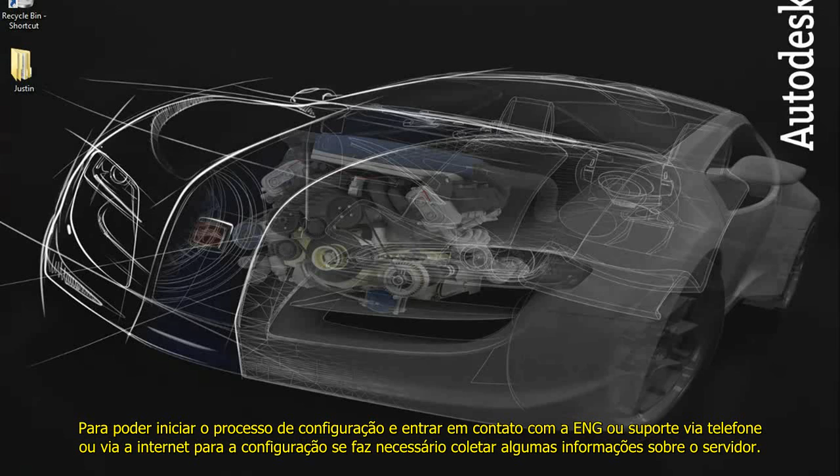To do this, we'll want to go to your Start menu, All Programs, Accessories, Command Shell, and in the Command Shell type in ipconfig /all and hit Enter. This will display all your machine's relevant information.

What we're interested in here is the host name as well as the physical address, or commonly known as the MAC address. Once you have this information, you're ready to call or contact the registration department so that you can register your serial numbers and receive your keys.

In terms of contacting the registration department, you can do so through the installation, or if you have gotten past that point, there are two other methods. One is over the web, by going to the website listed here on the screen, or by calling 1-800-551-1490. Keep in mind that there are 4 primary things needed by the registration department to register your license.

First is the host name, second is your physical address, third they'll need your company name, and fourth they'll need the serial number or serial numbers of the products that you want to register for licenses. Once you have those 4 things, feel free to contact the registration department at your leisure.

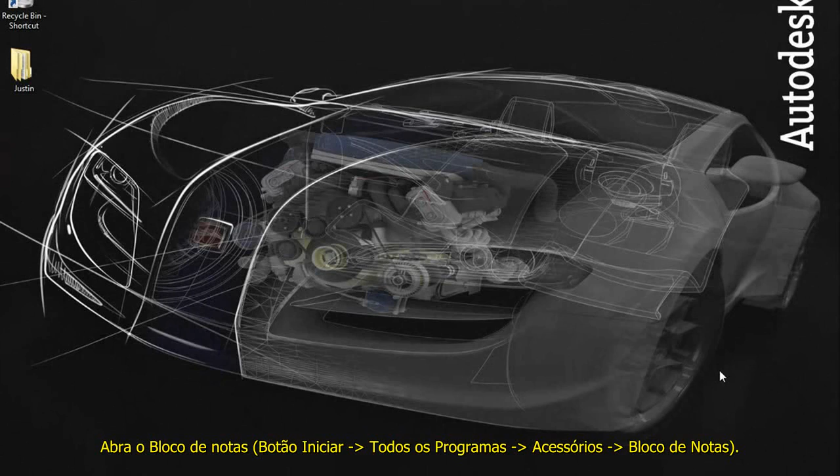Next, we'll need to create a debug file. Now that we've registered the license and we have it ready, we'll want to go to the Start menu, All Programs, Accessories, Notepad. In this blank notepad, all we'll need to do is do a File Save As, and save this notepad somewhere easily accessible.

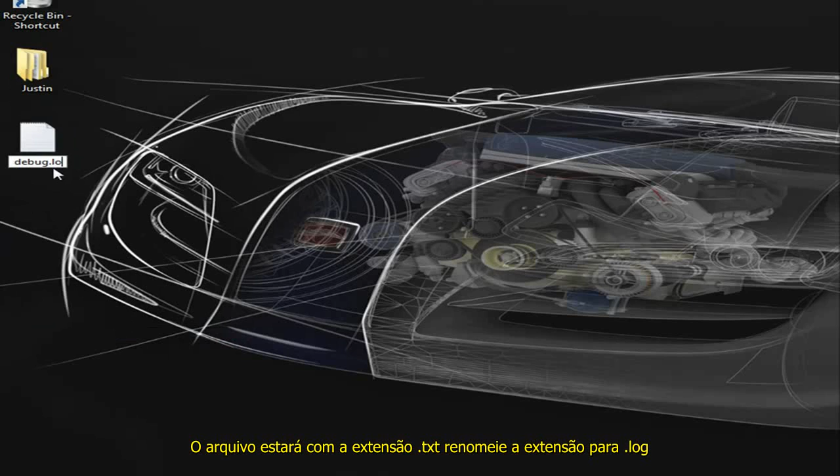In this case, I'll save it to the desktop. You want to ensure that you name it something obvious for debugging purposes. In this case, we'll utilize just debug. Once you've saved it, you'll want to right-click and rename the file extension from .txt to .log for log file. This will be utilized in creating your license service.

After you've created the debug file and you have registered your serial numbers and have your licenses, we'll need to place these licenses somewhere local to your machine in which they will not move. This is because the service that you set up will query a specific path to where you've placed these files, and if they don't move, then you don't need to worry about compromising the service that you set up.

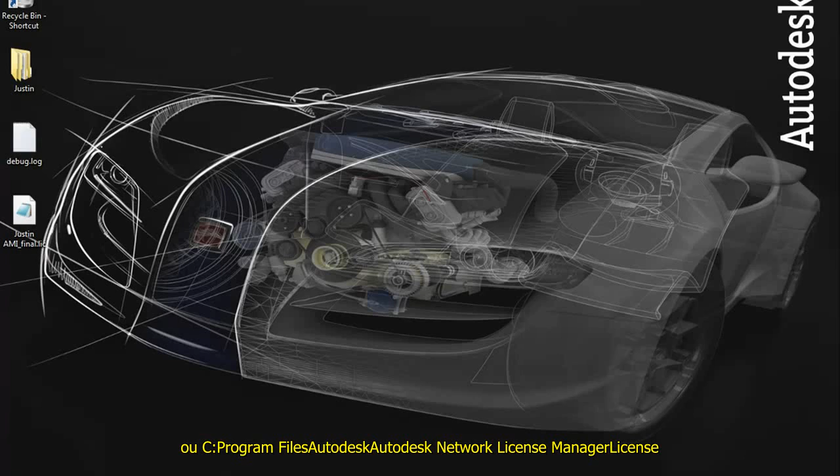The best place is in the installation directory for the license manager. To access this, open a Windows Explorer by right-clicking on the Start menu and selecting Explorer. This will launch your Windows Explorer, and you can navigate to your C drive, Program Files, or Program Files x86 on 64-bit machines, Autodesk Network License Manager, License Directory.

This is a safe place to place all your licenses and debug files in such a way that they won't move. After you've placed them there, you're ready to create your service.

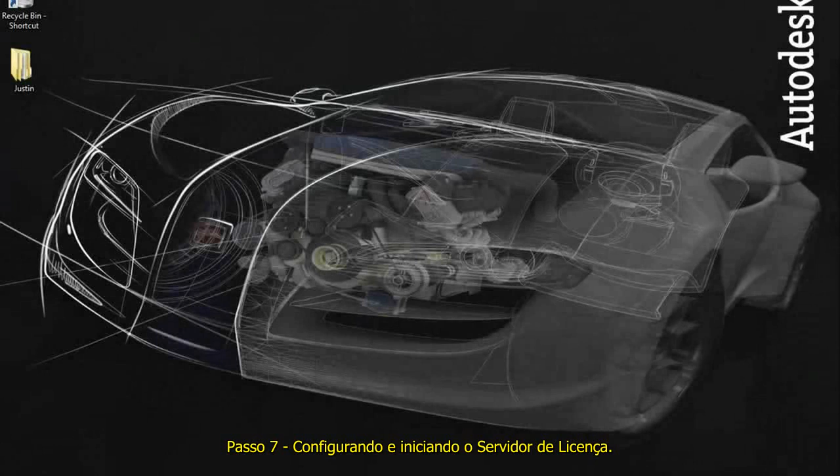To create a service with Flex License Manager, you need to first open up the service creation tool, which is referred to as the LMtools. To access the LMtools, first you'll want to go to your Start menu, All Programs, Autodesk, Network License Manager, LMtools.

On the first Server/License File tab, ensure that Configuration Using Services is selected. If so, you should have an option for a Configure Services tab, which you want to navigate to now.

There are 4 paths to fill out here, the first being Service Name. You can name this anything you'd like, and for this example, we'll use Moldflow.

In the next path, you'll need to browse to the LMGRD file, which is the license daemon utilized for your service. To do so, select on the Browse option next to this path and navigate to your C drive, Program Files, or Program Files x86, Autodesk Network License Manager, and select the file lmgrd.exe and select Open. This will specify the path for the relevant file.

The next 2 paths are for your license file and your debug file. Utilize the Browse tool and browse to the location that you placed for both of them. Since you should have placed them together, it should be very easy to do so.

After selecting each file and browsing to them, you'll want to activate the Use Services option as well as the Start Server at Power Up options at the bottom. After doing so, select the option to Save Service and select Yes.